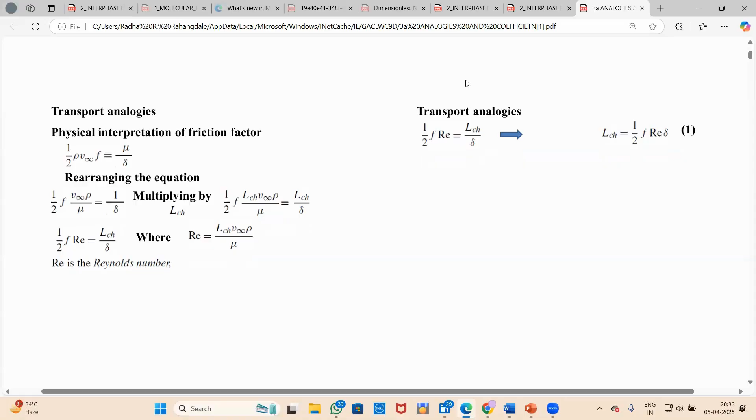Let's dive into this. Firstly, we're going to look into the friction factor. From the previous segment, you have learned about the physical interpretation of the friction factor. Now we are going to continue this. We got the equation half rho V infinity F is equal to mu by delta, which we learned from the physical interpretation in the previous segment. On multiplying LCH to both terms and rearranging, we get half F RE is equal to LCH by delta, where LCH is the characteristic length, F is the friction factor, RE is the Reynolds number, and delta is the momentum transfer boundary layer thickness.

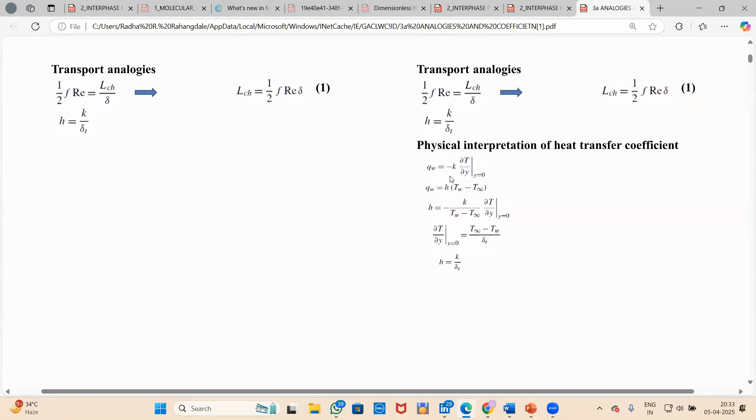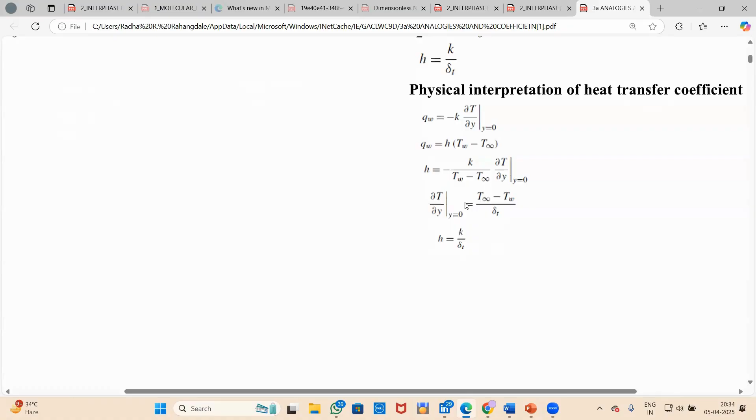We got H is equal to K by delta T. Now moving on with the heat transfer coefficient. Again, we know that QW is equal to minus K del T by del Y at Y equals 0, which is Fourier's law of heat conduction. And QW is equal to H into TW minus T infinity, which is Newton's law of cooling. On rearranging the term and bringing del T by del Y at Y equals 0, which is the interface condition, we get the equation H is equal to K by delta T. H stands for heat transfer coefficient, while K stands for the thermal conductivity. Delta T is the thickness of the heat transfer boundary layer.

From the dimensionless numbers, we got the idea that Nusselt number is equal to H into LCH by K. On equating H is equal to K by delta T and Nusselt number is equal to H LCH by K, we get the equation LCH is equal to Nusselt number into delta T.

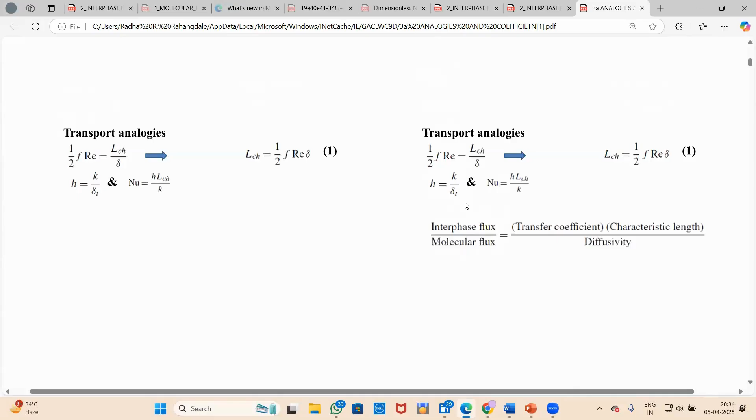Now moving on to the last segment, that is the physical interpretation of mass transfer coefficient. From the last segment, we got the idea that Kc is equal to minus DAB upon CaW minus Ca infinity into dCa by dy at y equals 0. Again, rearranging the term and bringing del Ca by del y to the left hand side, we get the term Kc is equal to DAB by delta C.

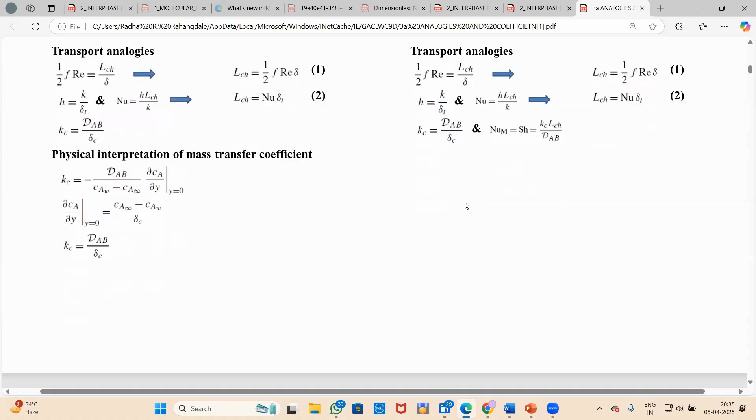Again, from dimensionless numbers, we got the idea that Sherwood number is equal to Kc into LCH by DAB. This number can also be called the Nusselt number in mass transfer. So finally, equating Kc is equal to DAB upon delta C and Sherwood number is equal to Kc into LCH by DAB, we get the idea that LCH is equal to Sherwood number into delta C, where delta C stands for the mass transfer boundary layer thickness.

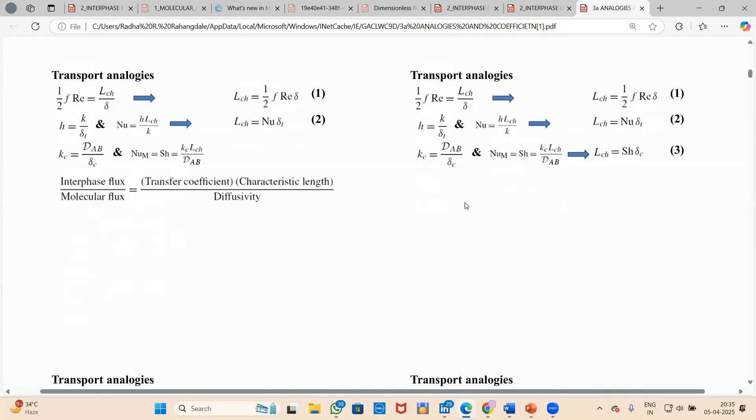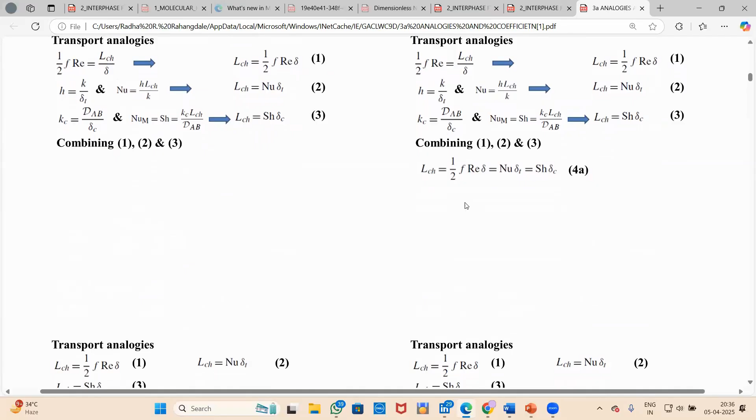So from the friction factor, we got LCH is equal to half F RE into delta. From heat transfer, we got LCH is equal to Nusselt number into delta T. From mass transfer, we got LCH is equal to Sherwood number into delta C. On equating all three equations, we get LCH is equal to half F RE into delta, which is equal to Nusselt number into delta T, which is equal to Sherwood number into delta C. We mark this as equation 4a.

On rearranging this equation and dividing by Reynolds number on all three sides, we get half F delta is equal to Nusselt number upon Re into delta T, which is equal to Sherwood number upon Re into delta C.

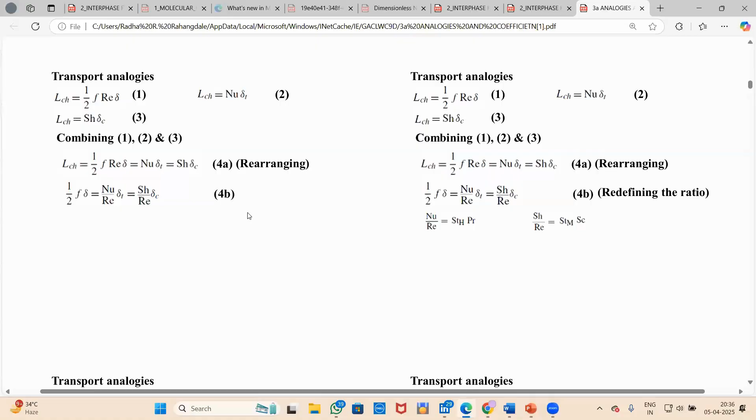Nusselt number upon Re is equal to STH into PR, where STH stands for the Stanton number of heat, while Sherwood number upon RE is equal to STM into SC, where STM stands for the Stanton number of mass, SH stands for Sherwood number, RE stands for Reynolds number, and SC is the Schmidt number.

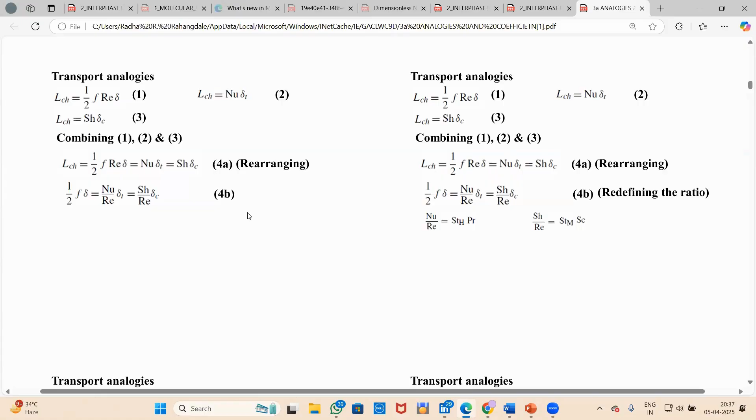Hence, we can rearrange this term for equation 4b as half F delta is equal to Nusselt number upon RE into del T, which is equal to Sherwood number upon RE into del C. Combining all equations with our newly generated equations, that is Nusselt number upon RE is equal to STH into PR, and Sherwood number upon RE is equal to STM into SC, we get...

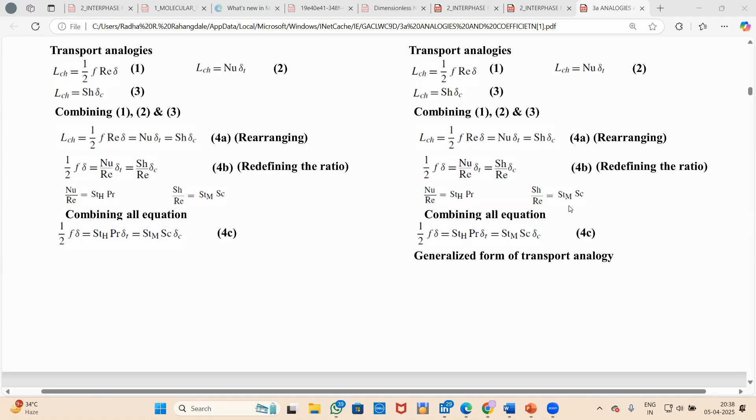So we can again generalize our equation from before: half F delta is equal to Sth into Pr into delta T, is equal to Stm into Schmidt number into delta C. Hence this is our generalized form.

This generalized equation will be further used for our Reynolds analogy, our Chilton-Colburn analogy, and our Prandtl's analogy.

Now let's move on with our first thing, that is Reynolds analogy. From the generalized form of transport analogy, we got the term half F delta is equal to Sth into Pr into delta T is equal to Stm into Schmidt number into delta C, where Sth stands for Stanton number of heat transfer and Stm stands for Stanton number of mass transfer.

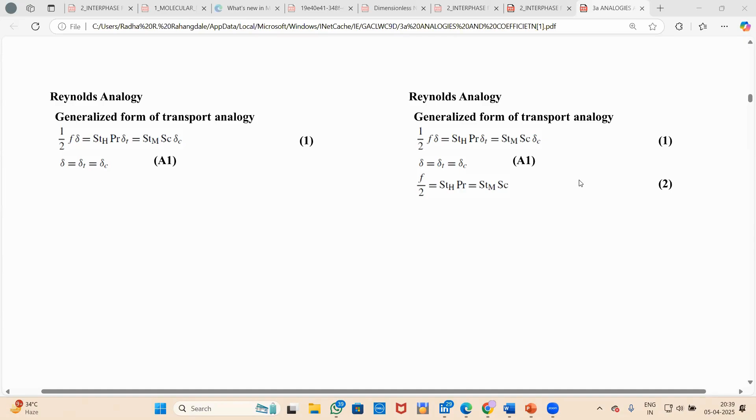Please do remember that Reynolds analogy is only and only valid for gases, and no other condition it is valid for.

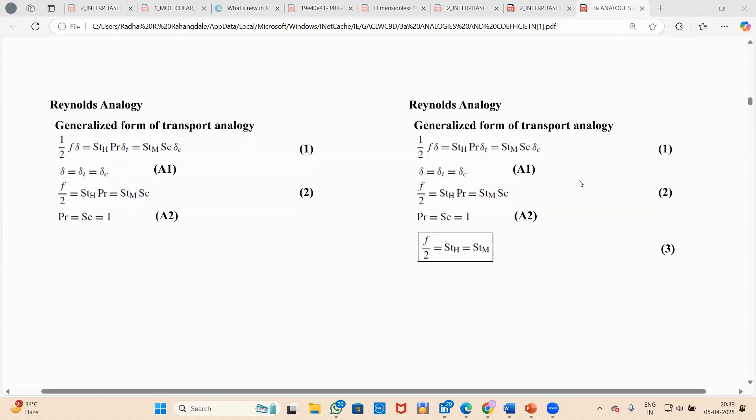In Reynolds analogy, we make the first assumption, that is delta is equal to delta T is equal to delta C. With this first assumption, we get the idea that F by 2 is equal to Sth into Pr is equal to Stm into Sc.

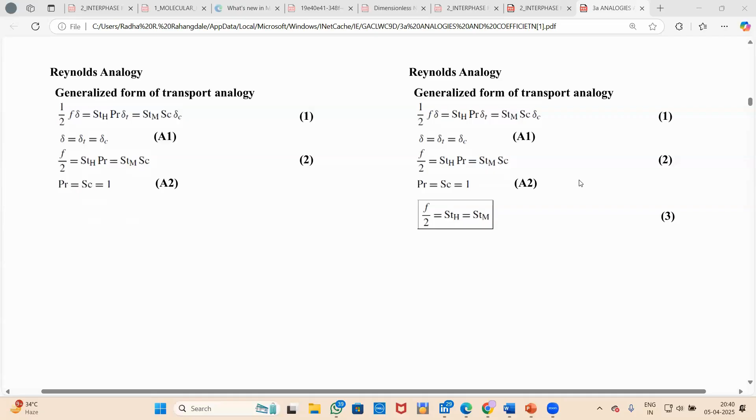We take the second assumption, that Prandtl number is equal to Schmidt number is equal to 1. Putting this value into equation number 2, we get F by 2 is equal to Sth is equal to Stm, which we define as equation number 3.

As I said before, equation 3, F by 2 is equal to Sth is equal to Stm, is known as the Reynolds analogy, and this is only and only valid for gases.

We also have an equation, T is equal to Tw plus T infinity by 2, which is the average temperature, and every time we take the average temperature. With this, I would like to conclude the Reynolds analogy and move on with the Chilton-Colburn analogy.

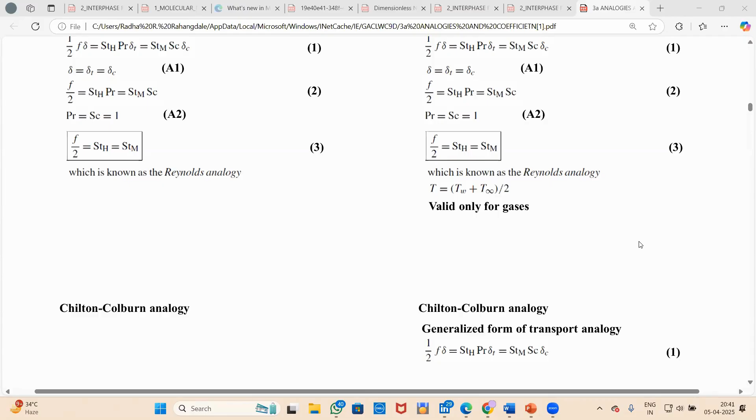Now we will move forward with the Chilton-Colburn analogy. We have seen the Reynolds analogy, which is valid for only gases; we can't apply Reynolds analogy for liquids. So now we will use Chilton-Colburn analogy, which is valid for both gases and liquids. It also has some limitations which we will learn later on, but for now we move forward.

As we have seen, the generalized form of transport analogy is half F delta equals Stanton number for heat transfer into Prandtl number into delta T, equals Stanton number for mass transfer into Schmidt number into delta C.

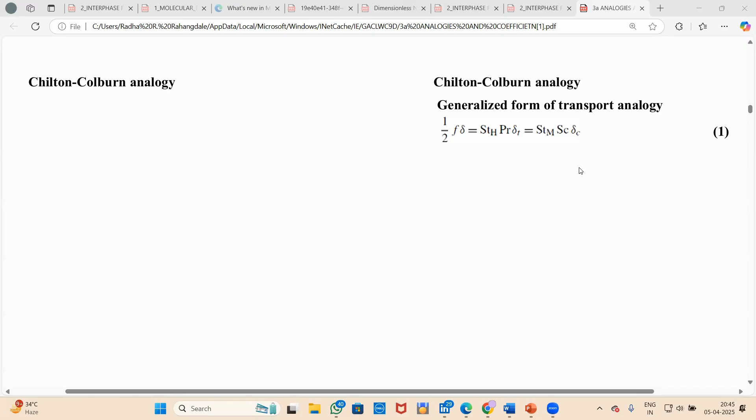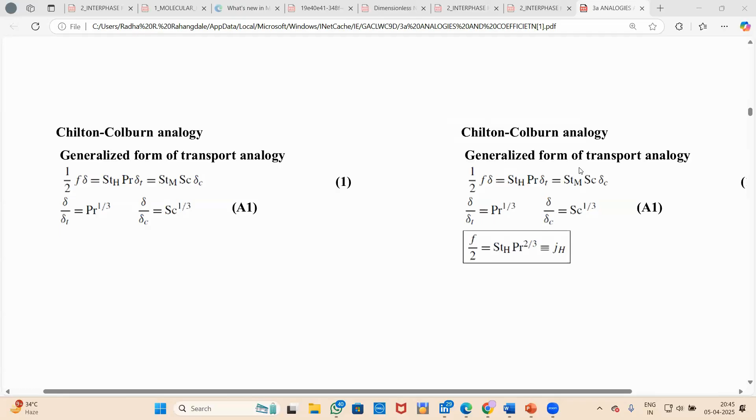Here, we will divide delta by delta T and write it as Prandtl number to the power 1 by 3, and also delta by delta C equals Schmidt number to the power 1 by 3. Then we get F by 2 equals Stanton number for heat transfer into Prandtl number to the power 2 by 3, which is equal to Jh.

So from where do we get this? We have this general transport analogy, then delta by delta T we write as Prandtl number to the power 1 by 3. We substitute this value into the transport analogy and get F by 2 equals Stanton number for heat transfer into Prandtl number to the power 2 by 3, which is equivalent to Jh.

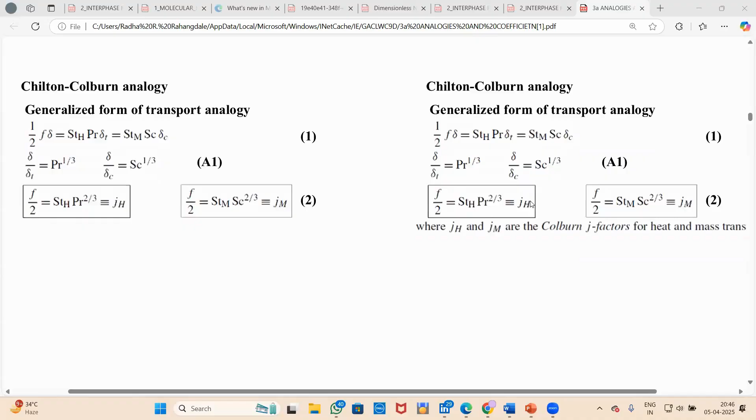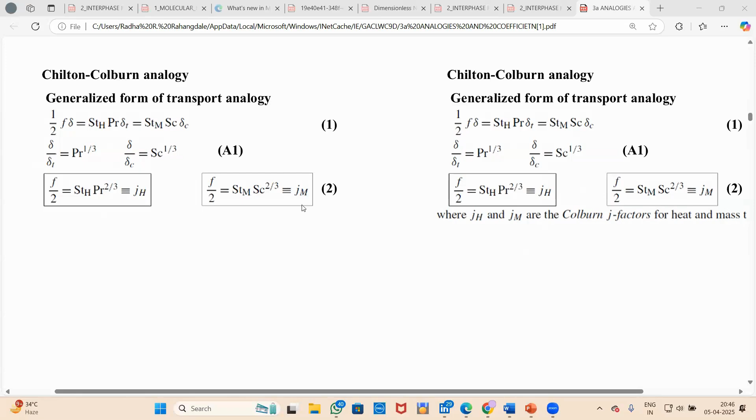Similarly, as we did it for Prandtl number for heat transfer, we now do the same for mass transfer. We substitute delta by delta C equals Schmidt number to the power 1 by 3 into our generalized form of transport analogy, and we get F by 2 equals Stanton number for mass transfer into Schmidt number to the power 2 by 3, which is equal to Jm. Here, Jh and Jm are Colburn J factors for heat and mass transfer.

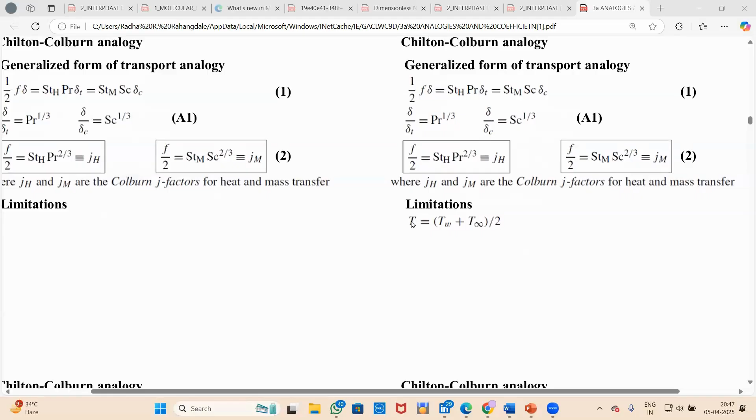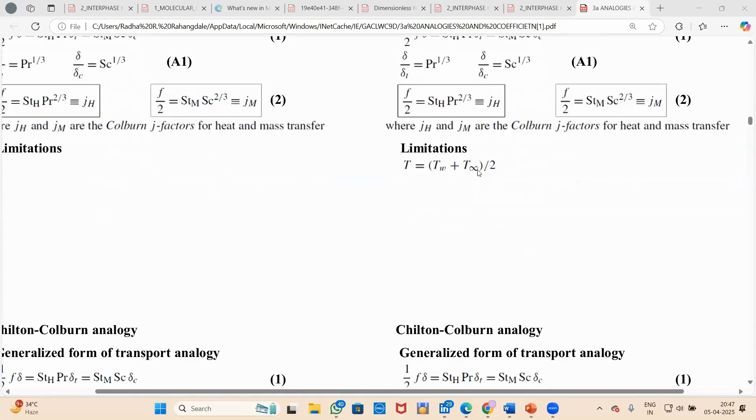Moving on, what are the limitations? Like we have seen some limitations in Reynolds analogy, similarly in Chilton-Colburn also there are some limitations. The temperature we are using is the average temperature equals to TW plus T infinity by 2. Here T infinity is your bulk temperature and TW is the temperature at your interface.

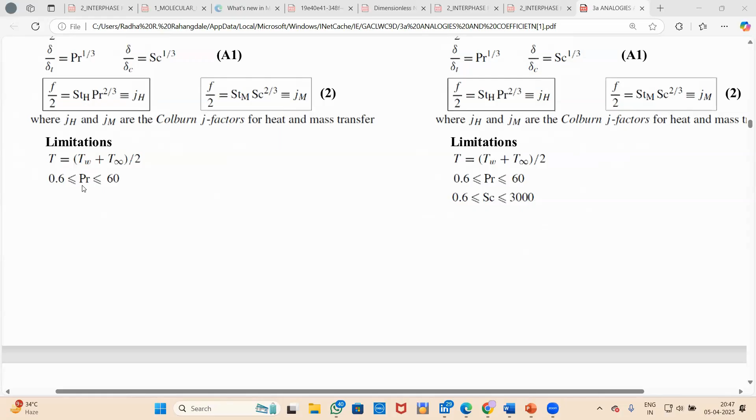Further, moving to the limitations, there is a range of Prandtl number. If Prandtl number varies from 0.6 to 60, then only we can use the Chilton-Colburn analogy. So before moving forward in any question, first find the value of Prandtl number. If it lies between 0.6 to 60, then use the Chilton-Colburn analogy. Also, the Schmidt number should belong from 0.6 to 3000. If your question has Schmidt number range between 0.6 to 3000 and Prandtl number 0.6 to 60, then only use Chilton-Colburn analogy.

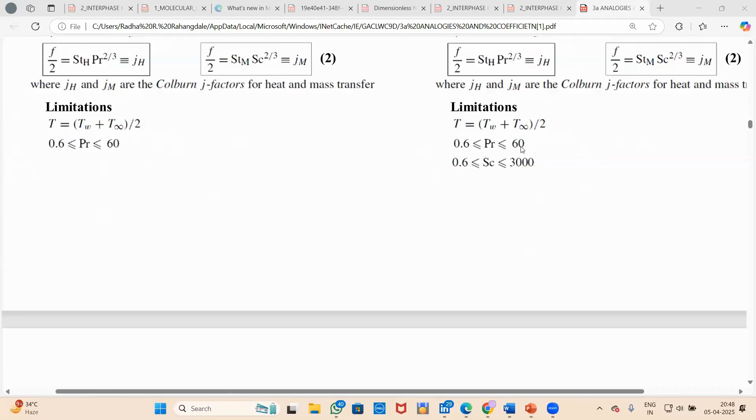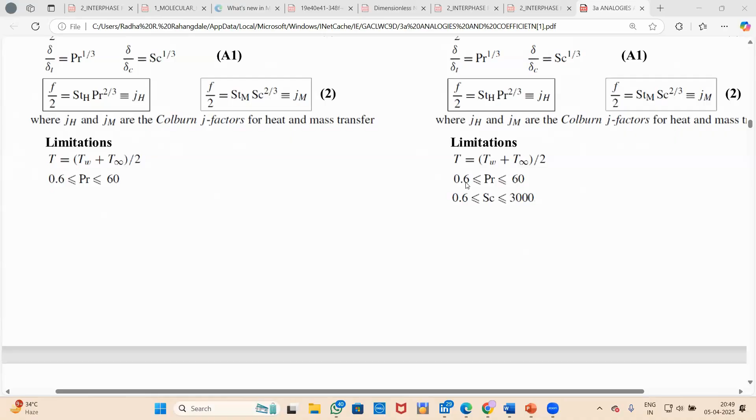Else, there is also some discrepancy. If your Prandtl number is near the boundary, like 0.625 or 59.75, if the value is near your boundary, the error will be greater. The approximation will not be that accurate, the error will be much more. If your Prandtl number value lies well between 0.6 and 60, like 30 or 10 or 20, then the error will be less. But at the boundary of your limits, the error will be more. So remember, at the boundary, if you are finding answers using Prandtl number or Schmidt number, the error will be more.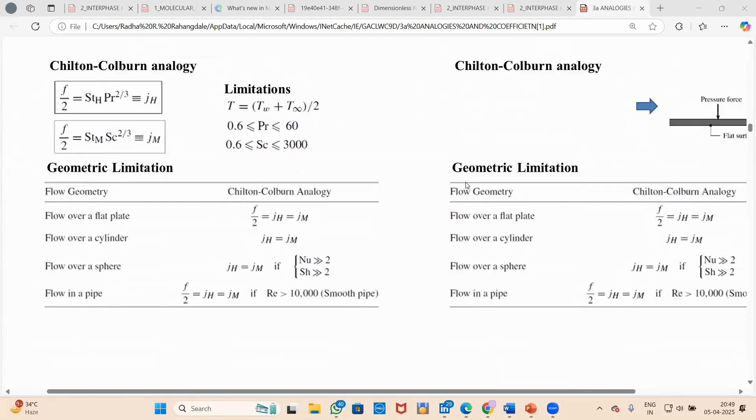Moving forward, there are some geometric limitations of flow geometry. For flow over a flat plate, we can use F by 2 equals to JH equals to JM. For flow over a cylinder, we can use JH equals to JM. For flow over a sphere, JH equals to JM if Nusselt number is much greater than 2 and Sherwood number is much greater than 2. For flow in a pipe, we can write F by 2 equals to JH equals to JM if Reynolds number is greater than 10,000 for a smooth pipe.

So now the question is why? Why is there such a discrepancy? Why have we not written the Chilton-Colburn analogy as F by 2 equals to JH equals to JM for each and every geometry? The reason behind it is the exposed area. For a flat plate, the exposed area is the surface, the interface you are using, so for that you can write F by 2 equals to JH equals to JM. But for a cylinder, the exposed area may vary, may be different, and that exposed area creates the difference. That's the reason you are not using F by 2 here, that's why you can't use F by 2 equals to JH equals to JM. So that's the reason the Chilton-Colburn analogy has some geometrical limitations.

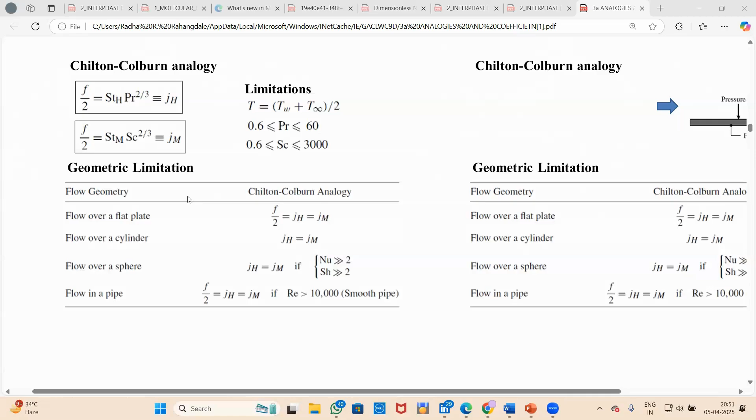Then moving forward, flow over a sphere: JH equals to JM if Nusselt number is much greater than 2 and Sherwood number is much greater than 2. Similarly, in pipe flow, there are some limitations. Mainly these limitations are just because of the exposed area through which the fluid is flowing.

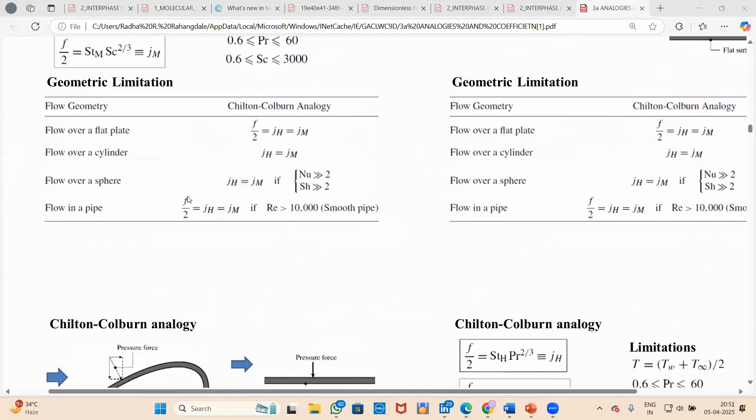Now moving forward, there are some questions. So basically, this is the concept of the Chilton-Colburn equation.

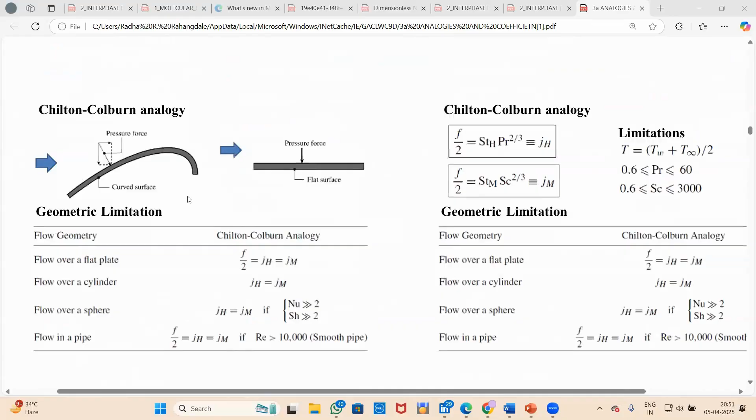Radha has given you a lot of information about Chilton-Colburn, and even I've given you a lot of information about Reynolds analogy. These were the two main analogies we have learned in transport phenomena. Now we are giving you another analogy, which is apart from our course, and it's maybe an advanced analogy, part of advanced transport phenomena.

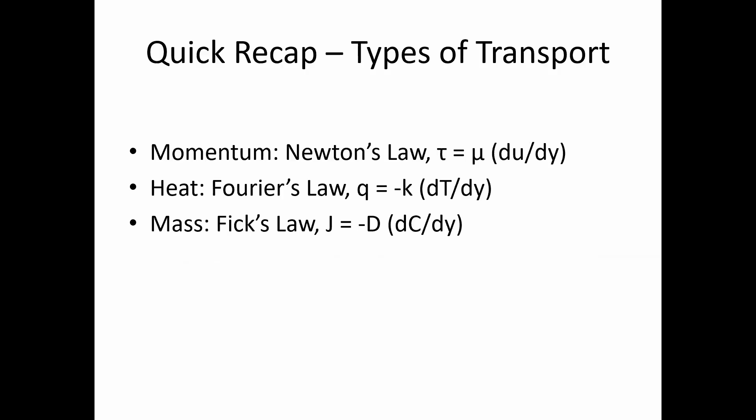Radha has given you a lot of information on Chilton-Colburn analogy, and even I have discussed a lot about Reynolds analogy. So now we're going to move on to the next part, which is not part of our transport phenomena, but maybe part of advanced transport phenomena: the Prandtl-Taylor and von Karman analogies. These are the two advanced analogies for momentum, heat, and mass transfer. We have already covered what are transport analogies, what are their uses. So the only question which arises now is Prandtl-Taylor's analogy and von Karman analogy. So moving on, the first analogy we're going to see is the Prandtl-Taylor analogy.

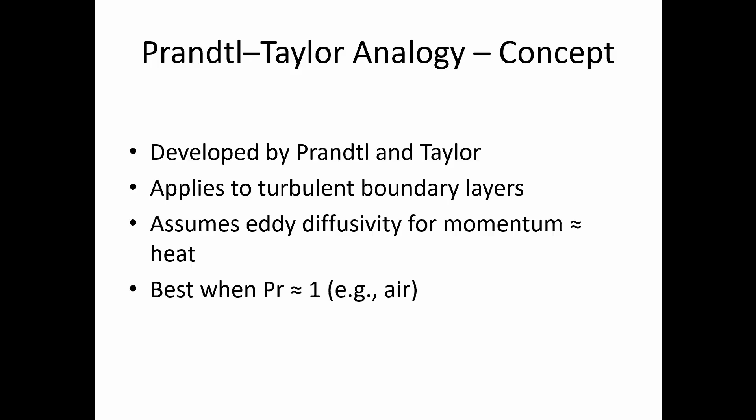This analogy is developed by Prandtl and Taylor. It applies to turbulent boundary layer, and assumes that eddy diffusivity of momentum is equivalent to heat. This analogy is best and perfect for Prandtl number equivalent to 1, that is air.

Moving on, we had some assumptions also. The first assumption is turbulent flow over flat plate. Secondly, similar eddy transport mechanisms are usually assumed. No pressure gradient is considered, and we consider only steady state flow.

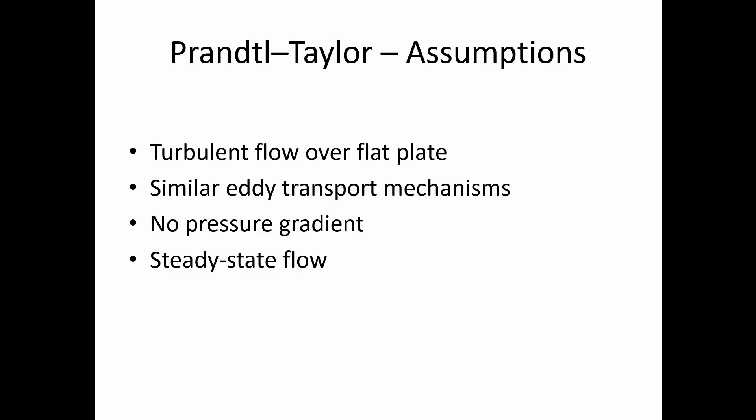We don't have much information about Prandtl-Taylor analogy, so we're going to stick with some gist which we have covered from advanced books and BSL books. So we got the first equation as Q upon tau W is equal to rho Cp into Tw minus T infinity, where Q is the heat flux, tau W is the wall shear stress, and Tw, T infinity are nothing but wall and free stream temperatures.

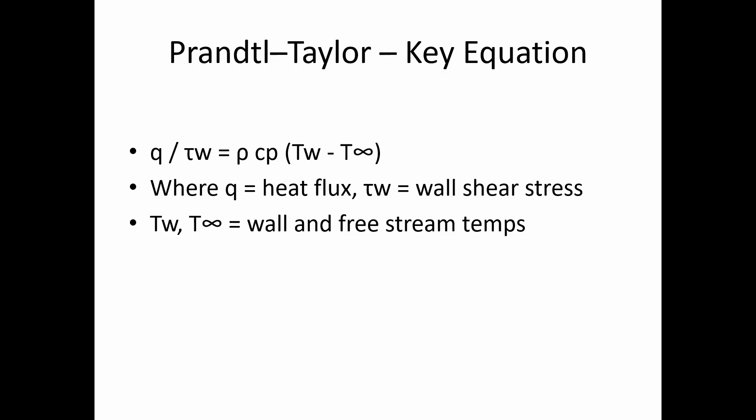Moving on, we also have a slide on where to use this Prandtl theory. First, as we discussed before, it can be used for turbulent flow. Secondly, for flat plate, and third for air or gases, in which Prandtl number is equivalent to 1.

So for Prandtl number much greater than 1, it is not accurate, or where pressure gradient is not equivalent to zero. So it is avoided to use for Prandtl number greater than 1, and only stick with Prandtl number equivalent to 1.

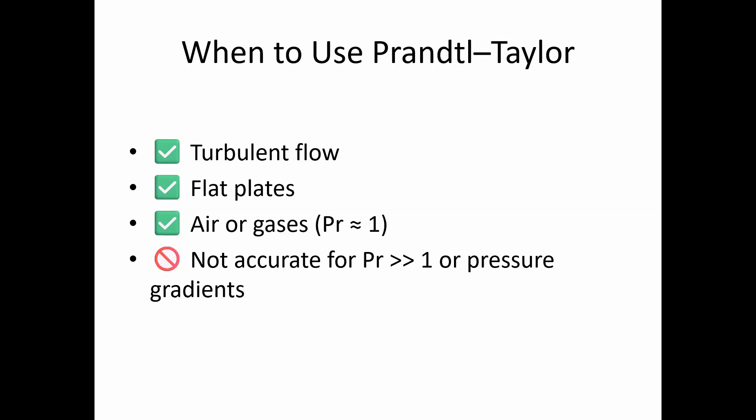Moving on, so the last analogy which we cover will be explained by Radha. Now for the next analogy, Radha is going to explain you von Karman analogy.

So our next analogy is von Karman analogy, based on integrating boundary layer equations, connects momentum and energy transfer, and considers velocity and temperature profiles.

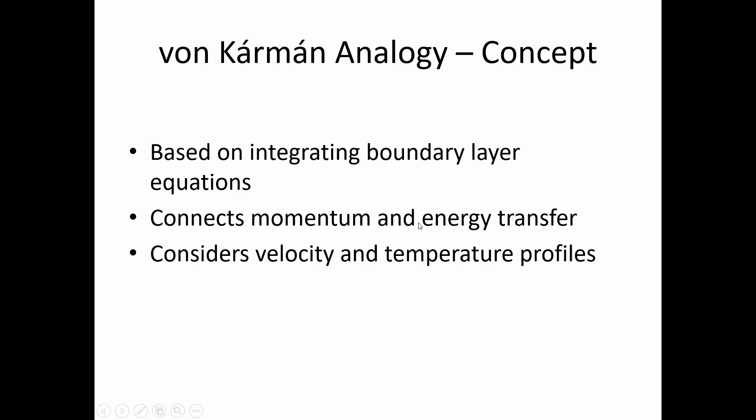In this analogy, we are just integrating the boundary layer equations. Whatever boundary layer conditions we get, we will put into our generalized transport analogy, and we will integrate it. So it connects energy and momentum transfer basics, and also considers velocity and temperature profiles.

So St, which is Stanton number, is equal to Cf by 2 into Prandtl number power minus 2 by 3. Stanton number is h by rho Cp u; this is the Stanton number for heat transfer. And here Cf is equal to skin friction coefficient.

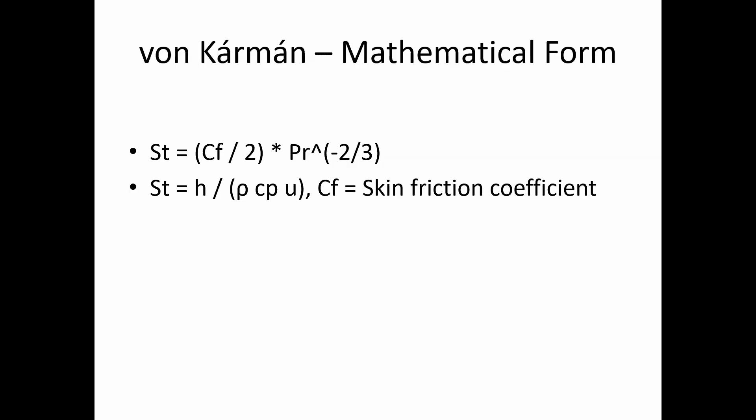Then moving forward, d theta by dx plus 2 delta star divided by rho u square into dou p by dou x equals tau w by rho u square, used with the energy equation for heat or mass transfer.

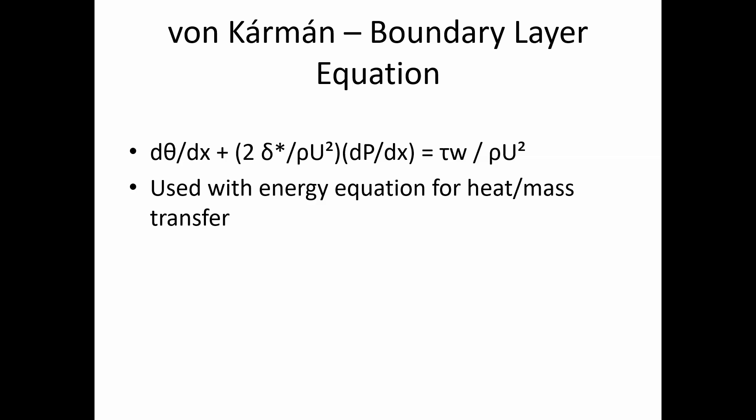As Yash previously told about the Prandtl analogy, we can't use that analogy for pressure variations and for Prandtl number greater than 1. So by using this von Karman analogy, we can use it even where pressure is varying. So in any case, if pressure is varying, then use this analogy.

Where to use it: for complex boundary layer flows, like when your boundary layer flow is very complex and you can't find an appropriate analogy to derive the equations. So that's where you will use this analogy. Pressure gradients present.

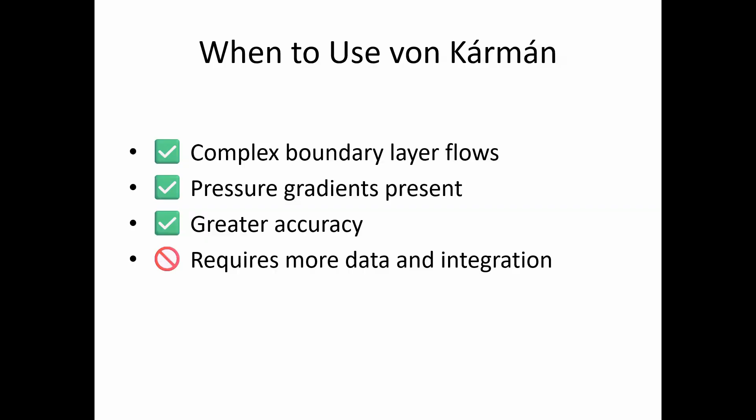The accuracy of this analogy is great, but it requires more data and integration. The good part is the complex part gets solved, pressure gradient if present also gets solved, and accuracy is also good. But the major disadvantage is that it requires more data and integration. Basically, you need to have strong concepts and strong mathematical solving skills.

So now, Prandtl-Taylor versus von Karman: what is the basic difference between these two analogies?

Prandtl-Taylor eddy diffusivity analogy has moderate complexity; in Prandtl-Taylor there is not much complexity in solving the mathematics, but in von Karman there is a lot of complexity in solving the equations.

Von Karman integral method gives higher accuracy. Prandtl-Taylor is best for Prandtl number approximately 1 for flat plates. Von Karman works for pressure gradients and a wide Prandtl number range.

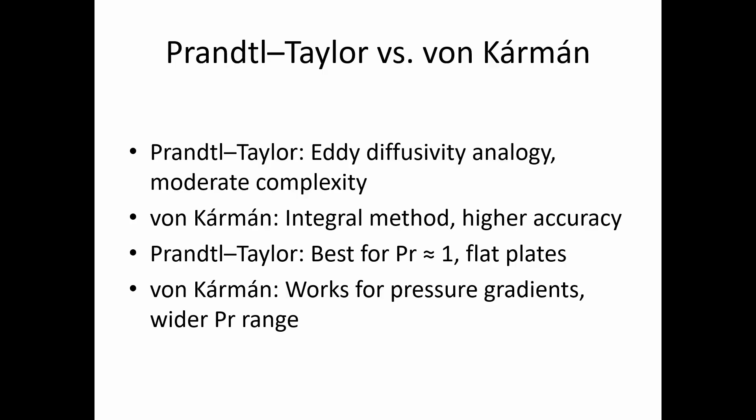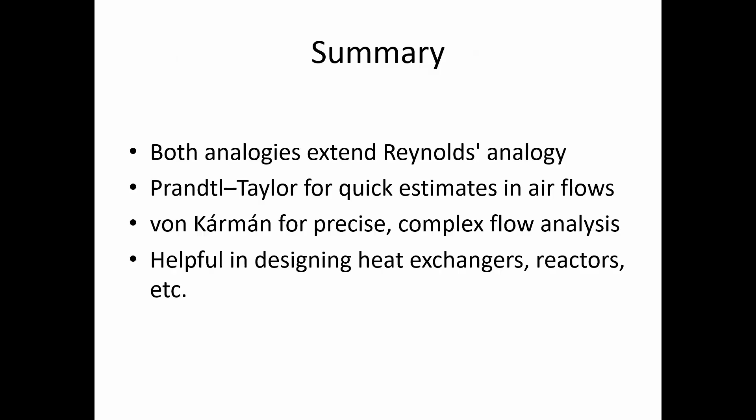Summary: both analogies extend Reynolds analogy. Prandtl-Taylor is good for quick estimates in airflows. Von Karman is for precise, complex flow analysis and is helpful in designing heat exchangers, reactors, etc.